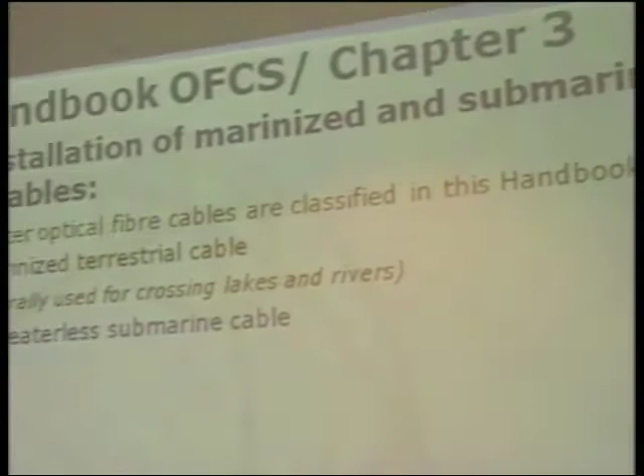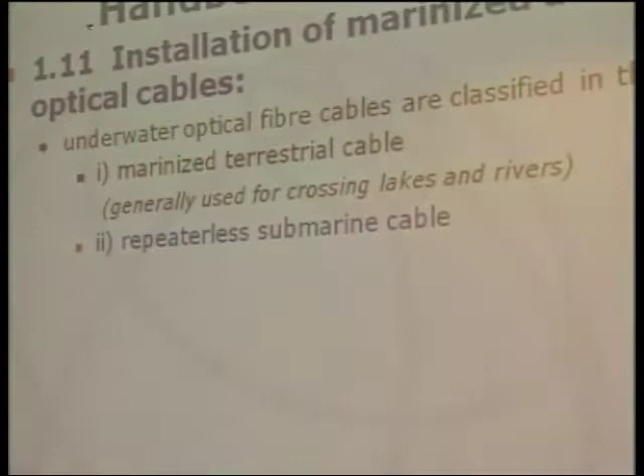ITU has some definitions, and the classification used in this handbook refers to the same classification used in a handbook specifically about this subject. Anyone interested in this subject could consult the handbook named here: the ITU Handbook on Marinized Terrestrial Cable, which was especially developed for marinized cable, because there are some countries that use it a lot. Part of the information could be useful to anyone interested in marinized and submarine optical cable.

There are three kinds of optical fiber cables. The first one is called marinized terrestrial cable. It's a kind of cable generally used for crossing lakes and rivers. Why the reference to marine and terrestrial?

The second one is repeaterless submarine cable, used both in shallow and deep waters, since the length is less than 300 kilometers. As we have a relatively short length, we can use this without any repeaters in the way the cable is installed.

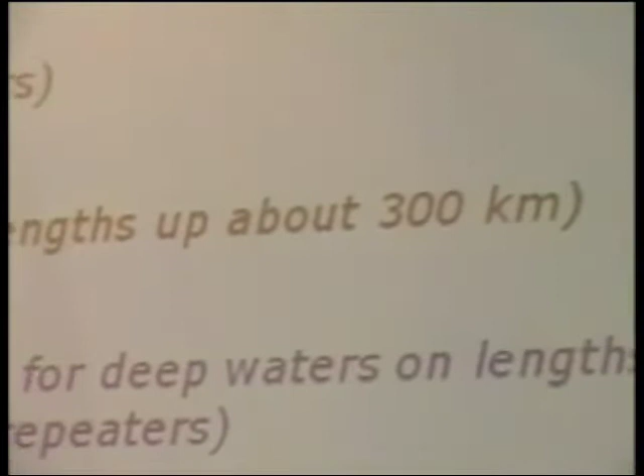The more general use of submarine cable is for long distance. This is repeatered submarine cable, used in underwater applications, mainly for deep waters on lengths that require the deployment of submerged repeaters.

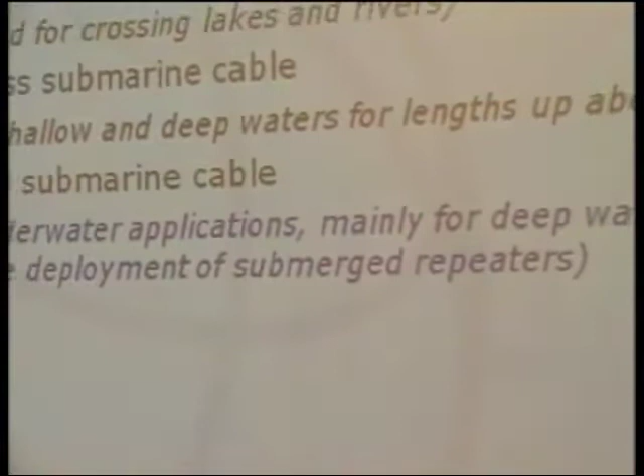There is a lot of information, especially on the internet, related to companies that deal with this kind of cable. We have a global network of cable interlinking all the continents, and there is a lot of cable planned to be installed in the future. Most of these cables are this kind.

It's a very specific kind of application. There is a lot of consideration that needs to be taken into account. The first one refers to the survey and route planning. There are a lot of points that need to be established.

Several months ago I was at one of the bigger manufacturers of this kind of submarine cable, and they have a book that lists the history, not of optical fiber, but of the old metallic cable. I was surprised to discover that the first, second, and third systems planned to work between the United States and Europe didn't work. They spent a lot of money, laid the cable, and it didn't work for different reasons. Every time people discovered what could be done better, most of the time they had already lost the money, and twice it closed the company.

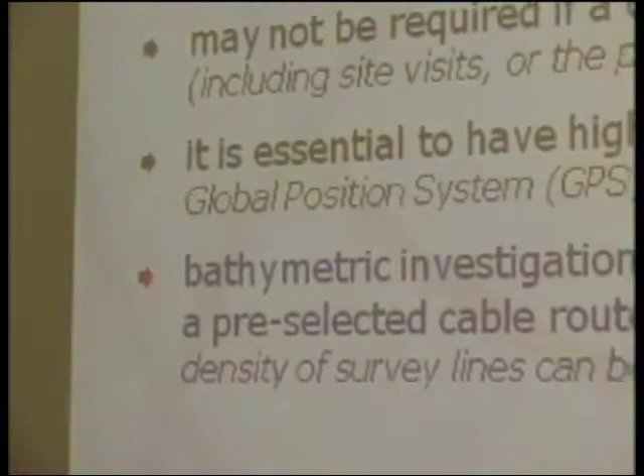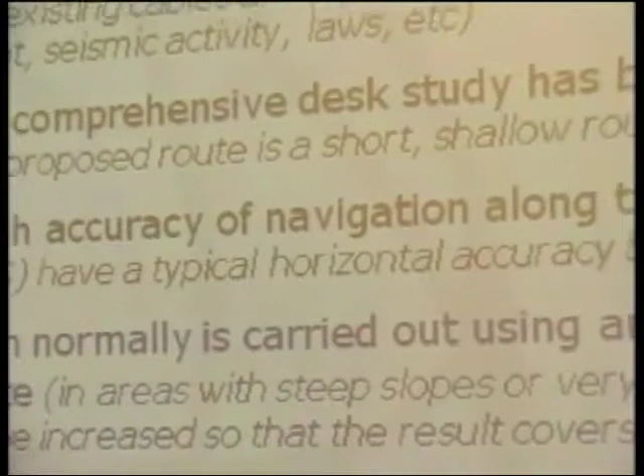Bathymetric investigation is a kind of measure of the sea level, normally carried out using an echo sounder that follows the planned route, to learn more especially about steep slopes or very rugged seabed.

The idea is that with a steady position the cable is under a certain kind of tension. When the depth is high and especially the slope is steep, it's necessary to consider some aspects related to the cable project, but also some aspects related to maintenance.

If repair is necessary for this kind of cable, the repair involves finding the cable at the bottom of the sea, bringing it to the surface, doing the repair, and putting it back down. This involves a lot of force, especially when we have these kinds of steep slopes.

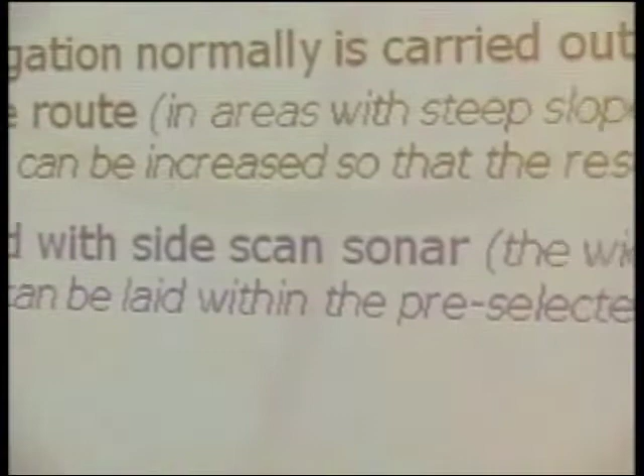Another equipment used to investigate this kind of route is the side scan sonar. The information from the side scan sonar and the bathymetric investigation are complementary, and it's necessary to use a kind of corridor. There is some regulation and recommendation related to the width of this corridor, to get information not only at the exact point where we intend to put the cable, but also in the neighboring region.

Depending on the results from bathymetric and side scan sonar surveys, it could be important to use an ROV, a remotely operated vehicle — similar to the ones used in the petroleum industry. It's a vehicle that can go near an area where some activity needs to be done; it has mechanical arms and cameras, and can see what's happening there and do some things. In this case, it could especially be used to get samples of rocks or points where people intend to anchor the cable or add protection. It's necessary not just to see, but to get samples to analyze.

If we are dealing with very shallow water, a diver inspection could be enough, and it could also be more cost effective.

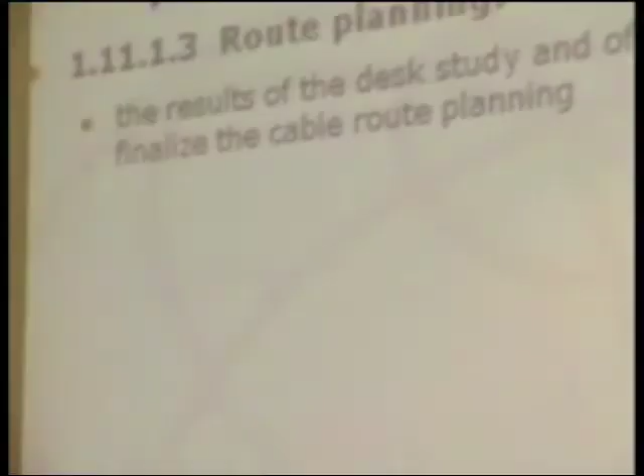Then, the third step is the route planning. Considering the result of this desk study and also the electronic route survey, the idea is to finalize a cable route planning, establishing the route that the cable will effectively use to be installed.

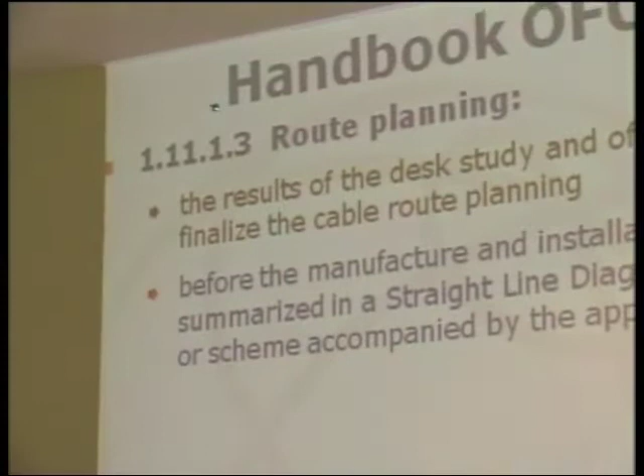Before the manufacture and installation of the cable, people generally put all this information into what they call the SLD, a straight line diagram that contains the whole extension of the cable. In each part or section of the cable, it shows what protection the cable will have, and also what we call waypoints, specific positions used as a reference. So we have a straight line diagram, a straight line representation of the cable that is intended.

It's a reference for everyone. Then the manufacturer needs to manufacture the cable considering this. Looking at it at first sight it seems not so difficult, but you need to use all the information about the depth of the sea just to get the correct relation between the cable length and the position the cable needs to reach.

Considering the vessels used for this, there are two kinds. The first one is the survey vessel, normally required for long or complex routes. In protected waters a small vessel is enough, and it could even be an adapted vessel, but when you need to do a survey over a long distance, especially between islands or continents, it's necessary to use a special design vessel.

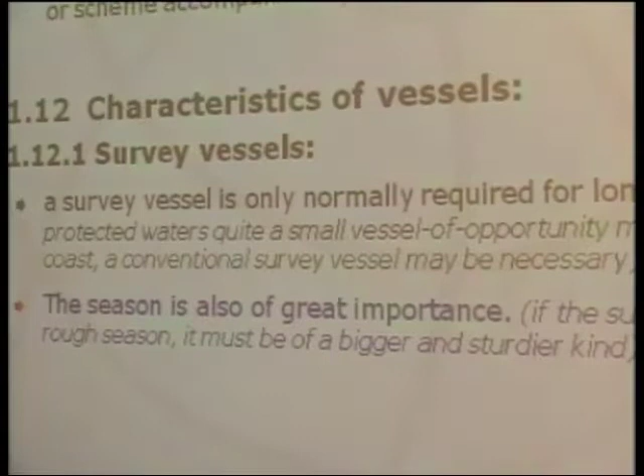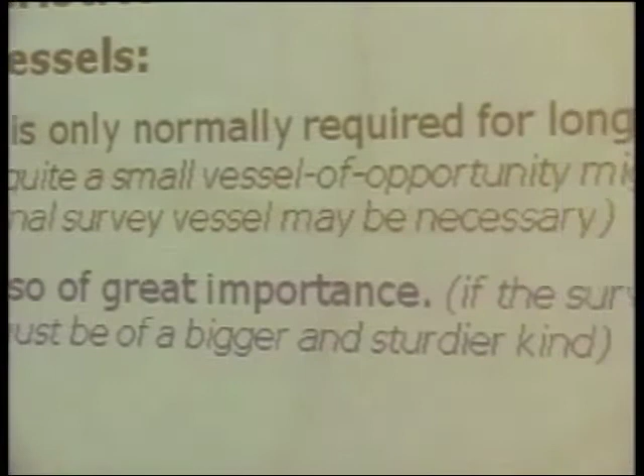As we have a lot of information to get at that point, it's easier to put just some basic information: the number of sections, the length, the kind of protection, the position where we have a splice box or repeaters. Considering this, we have since the first point to the last point, all the information necessary to build the cable. That's why it's so important.

When we consider a survey, the season is also of great importance. Of course, we are in a hurricane season, and it's a big problem to lay down the cable or to get information. It's necessary to know about the season, because we are doing study with ship, with a lot of people, and season could in some places in the world play an important role. Need to decide what and when to do.

This survey vessel, in general, when the survey requires more than a day in open water, more requirements are usually necessary for the survey vessel: rooms for equipment, adequate working space, communication facility, good power supply, etc.

If we have some distance around 700 to 1,000 kilometers, that's not so difficult in this kind of application. This survey could take around 15 to 30 days.

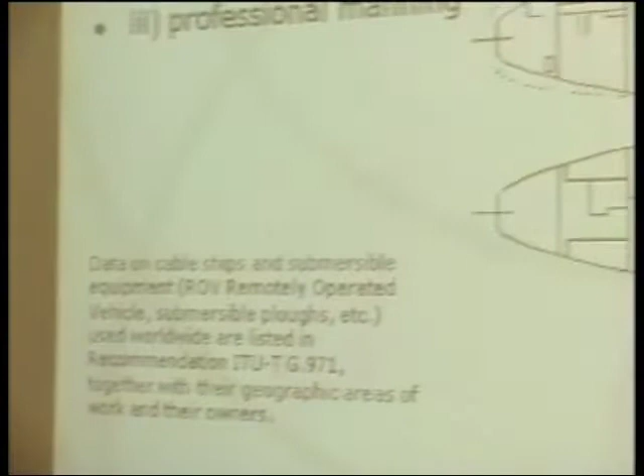Another kind of ship, the second kind used, we call a lay vessel. This ship will be responsible for putting the cable in the right position, and there are some important parameters to be considered. First, the people involved with this operation need to handle the cable according to the cable specification. Most of the time, there are cable manufacturer representatives inside until the end of the operation.

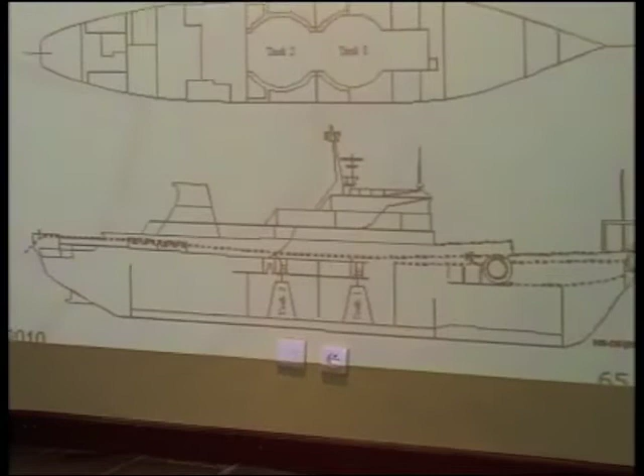The second important parameter is precise navigation equipment, normally differential GPS, because with all this information, the straight line diagram is necessary to follow, because putting the cable in a different position could cause some problems. It's very important to have specialized people, a professional manning of these things.

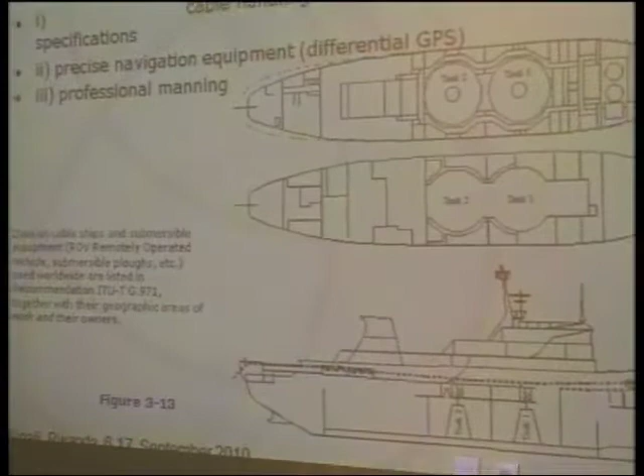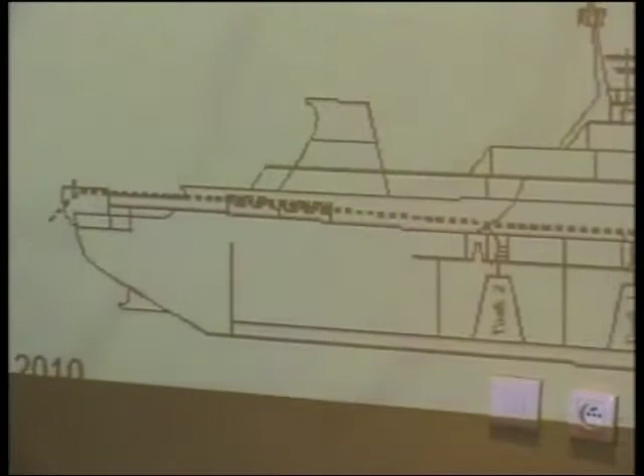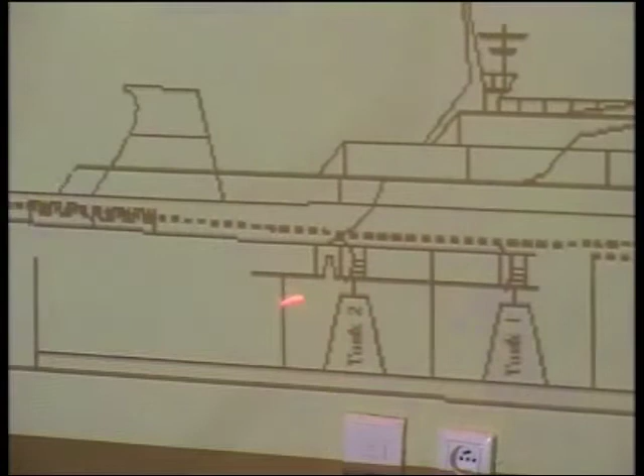This is a general view, and when you look here, we have tanks. Normally the cable goes in this way, and it's spooling in this tank. Each tank can hold around 600 kilometers, and a cable ship with this two-tank model can put around 1,200 kilometers inside.

The boat needs to have equipment to pull down the cable. Normally it's a caterpillar at that point, and the cable is carefully put at a speed of around 5 kilometers an hour, and the cable is manually arranged in these tanks in successive layers to fill the tank.

When a splice box arrives, generally there is some position on the deck to put the box, fixing it in a wood frame or some kind of device to keep the box in place. The cable continues to be put in there until all the cable is in.

After that, they have some equipment called the plug at the end of the cable, and after that we can move the ship to the right position and start from some final point of the cable, start to lay the cable. There are some details I will discuss later in this presentation, but there are different ways to do this in the shore part and in the sea level part, the deep sea part.

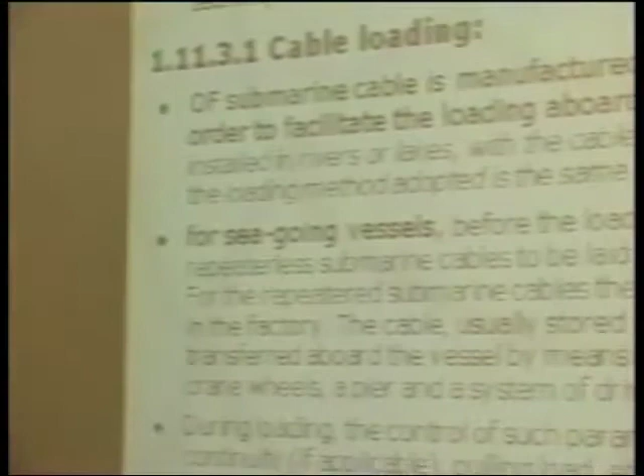Care must be taken when storing the cable in tanks in order to avoid uncoiling conditions, kinks, etc. That's why normally the people that put the cable in the tank or on the turntable are a lot of people working and carefully looking at the cable.

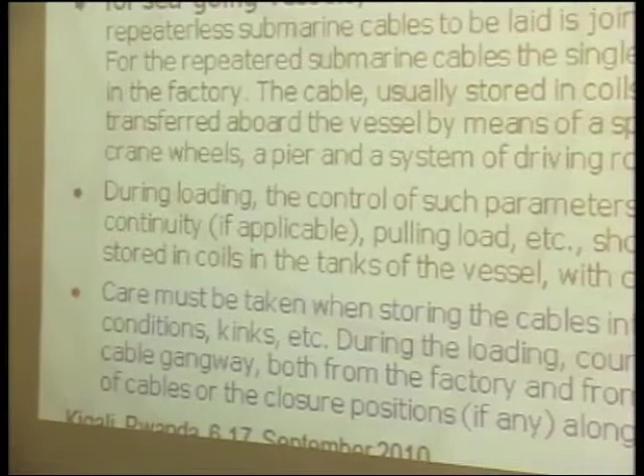During this loading, counters should be available along the cable gangway, both from the factory and from the vessel, in order to monitor the length of the cable and the closure position, if any, along the cable section. This is the first time outside the manufacturer that the condition of the straight line diagram is proved. Until that moment, the cable was in the manufacturer and they were trying to do it, but now, when we start putting it in the vessel, it's very important to assure that all this distance, this length, and the position are according to the project.

Any question till now?

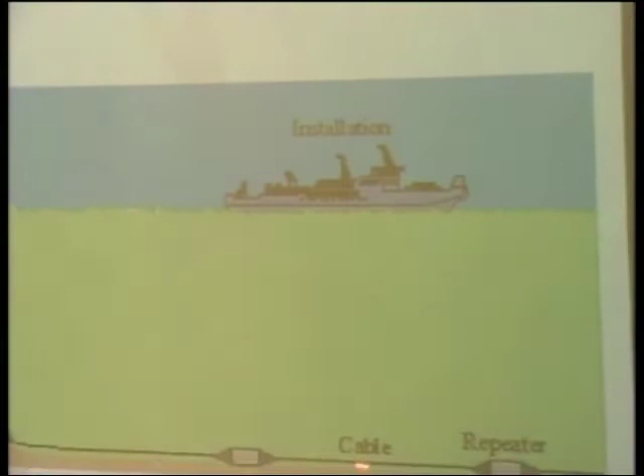This is a representation of the situation we can find. Each section could include a large amount of splice box or repeaters. Generally, the length of each section is around 400 to 500 kilometers, and is what we have in one of that coil we have seen before in the ship.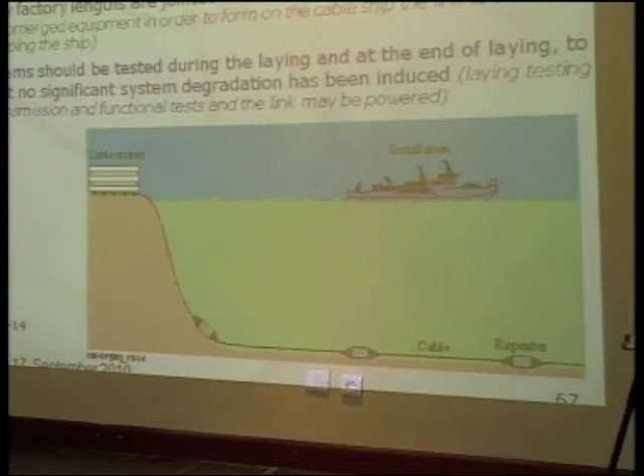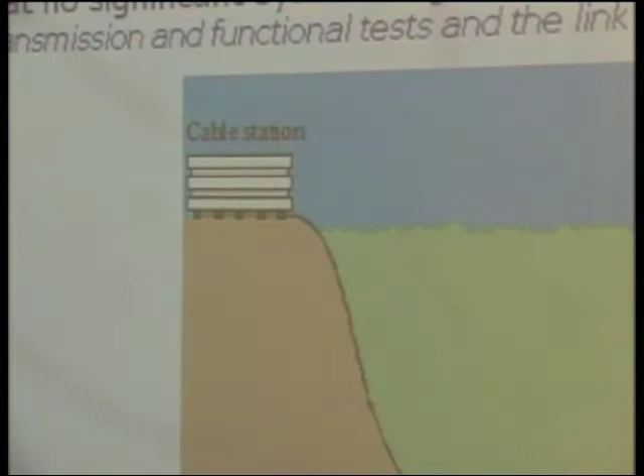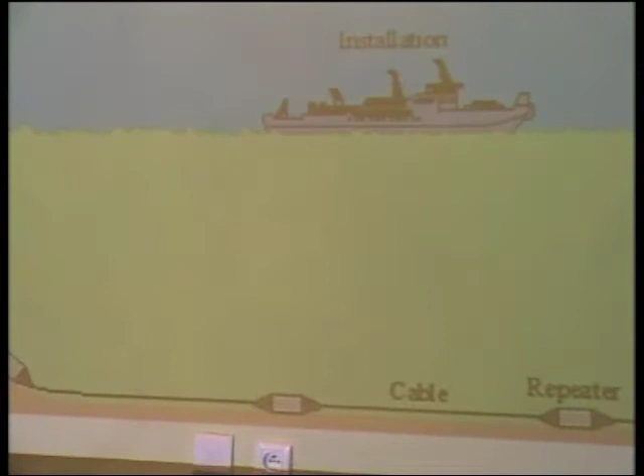This system should be tested during the laying and at the end of the laying to ensure that no significant system degradation has been induced. Laying testing includes transmission and functional test, and the link may be powered. In most of these cases, we have power supply at both ends of the cable, meaning all power for the repeaters comes from one of the ends.

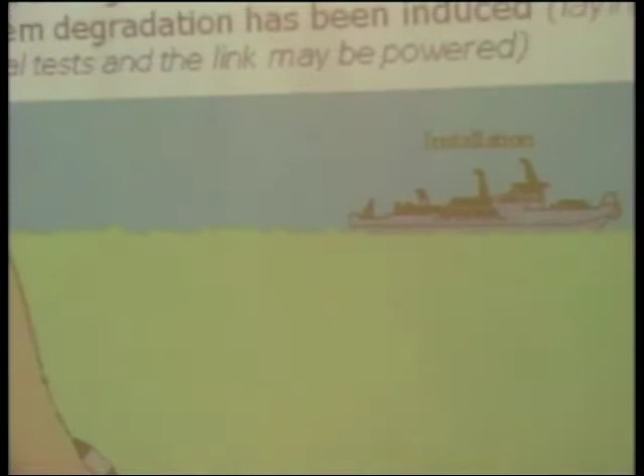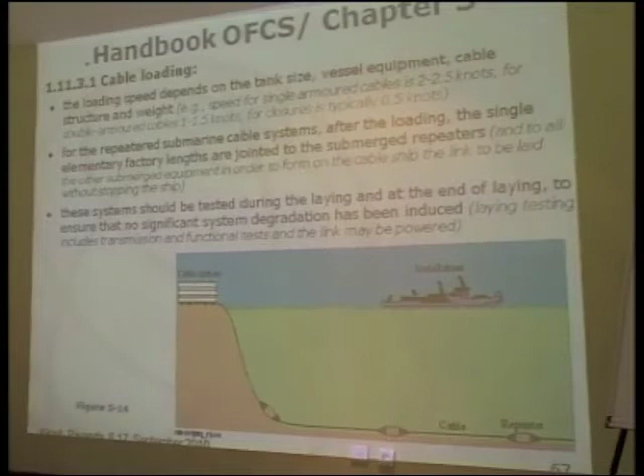If the cable is short, generally they put power supply on both sides, one in use, another as a redundancy. It's important to know that when the cable was loaded and after deploying, the optical characteristics, the functional characteristics of the repeaters, and also the electrical parameters are the way we expected.

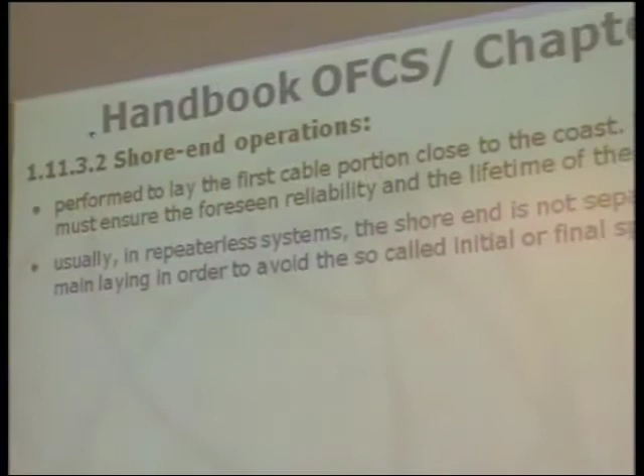One important point is the shore end operation. In this case, we deal with the first cable portion installed close to the coast, and this laying activity must ensure the foreseen reliability and life of the link. Usually, in repeaterless systems, the shore end is not separated from the main laying, in order to avoid an initial or final splice operation.

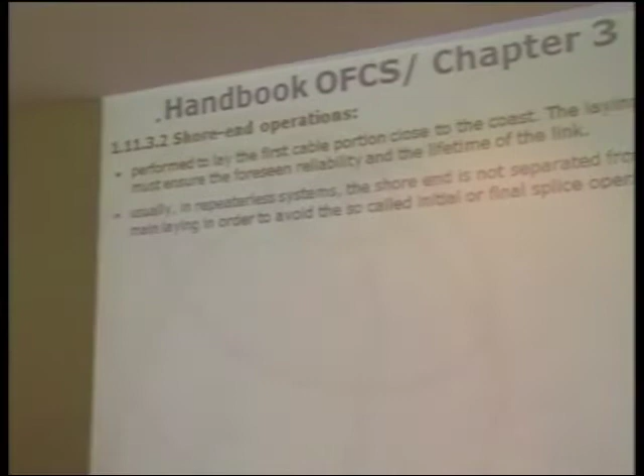It means that all the cable from the point at the terminal equipment is included in that portion put on the ship, and that end of the cable goes to land and reaches the station. If the station is not so near the sea shore, sometimes it's necessary to have a terrestrial cable to reach some point where it will be spliced with the submarine cable. Essentially, this choice depends on the distance the optical equipment will be installed inland.

The vessel is positioned on the foreseen cable route using a previously calibrated radio positioning system, and the cable is drawn out of the vessel by a service boat or floated by means of balloons. The idea is to bring the end of the cable to the beach and keep it suspended by balloons, which allows correcting the position of the cable before the removal of the balloons.

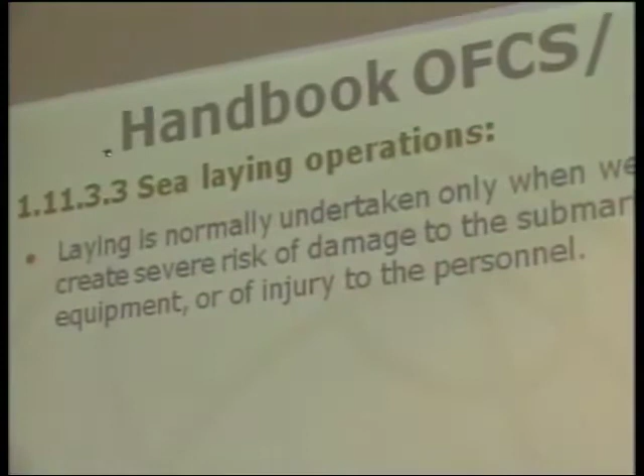After that first part, we start the sea lay operation. Laying is normally undertaken only when weather or sea conditions are not such that could create severe risk of damage to the submarine portion, the cable ship, the lay equipment, or even the personnel. That's why it's so important to study the seasonal effects in the region, as I mentioned before.

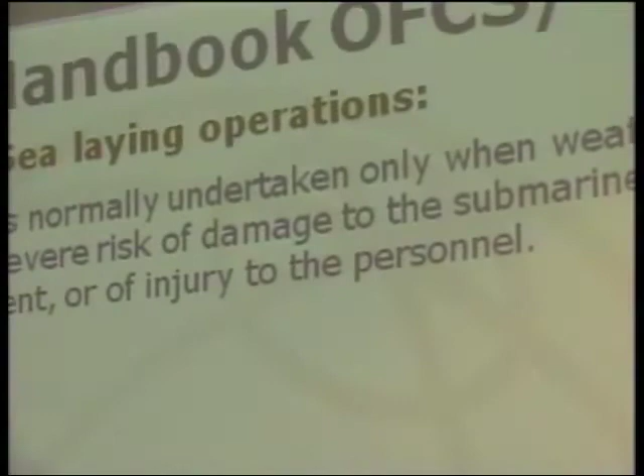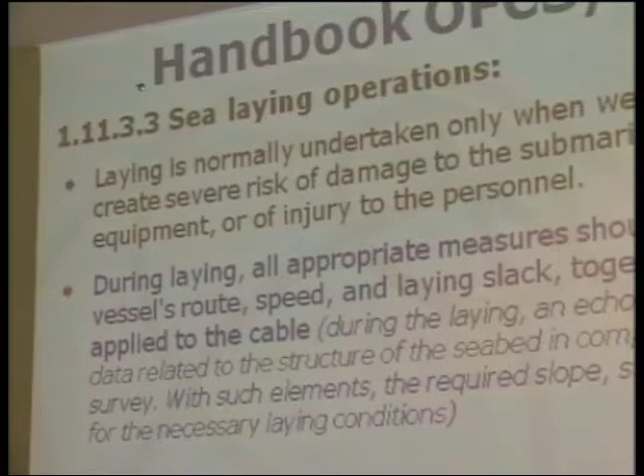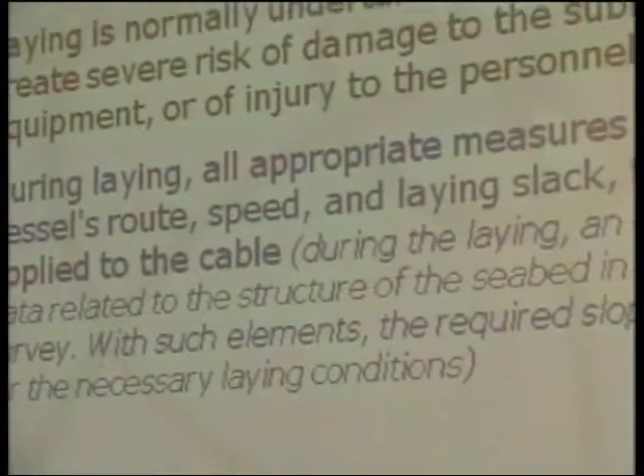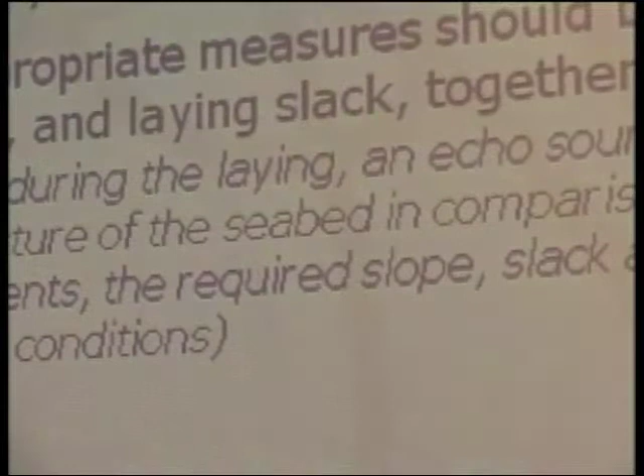During laying, all appropriate measures should be taken to control the vessel route using different GPS systems, along with the speed and laying slack, together with the pulling tension applied to the cable. During the laying, sometimes an acoustic sounder is used to compare data related to the structure of the seabed with the data obtained in the survey.

With such elements, especially the slope, the slack, and the vessel speed, it's possible to adjust conditions if necessary to achieve a perfect laying.

At a constant vessel speed, the cable is laid in a straight line, and the slope depends on the cable type, especially how heavy the cable is, and the vessel speed. The recommendation is to adapt the speed to the seabed profile. In this way, the slope must never be less than that of the bottom.

Then we have some movement of the cable, the slope of the cable. It's better to have this slope almost similar to what we have at the bottom of the sea. Otherwise, suspension and risk of faults could occur. Then all adjustments are made to correlate these three parameters to assure a good laying condition.

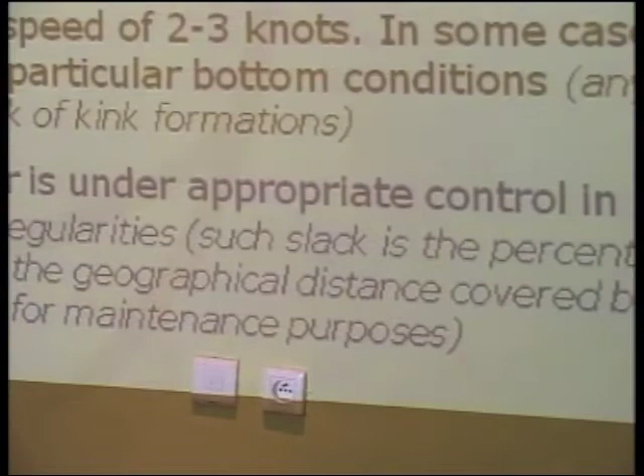It's important to use all the information we've gathered before to reach a good point that allows the cable being laid down to go to the bottom of the sea in good condition. This perfect condition to allow the cable to be put in the right position in the ocean is also important to recover the cable for maintenance purposes. The idea is to have the speed of the vessel and the speed of the cable laying related to each other, considering the profile of the sea bottom, to allow the cable to go down in the position planned.

As we move to lakes and rivers, I'd like to ask if there's anything we can detail more until now. Any questions, any doubts about this part so far?